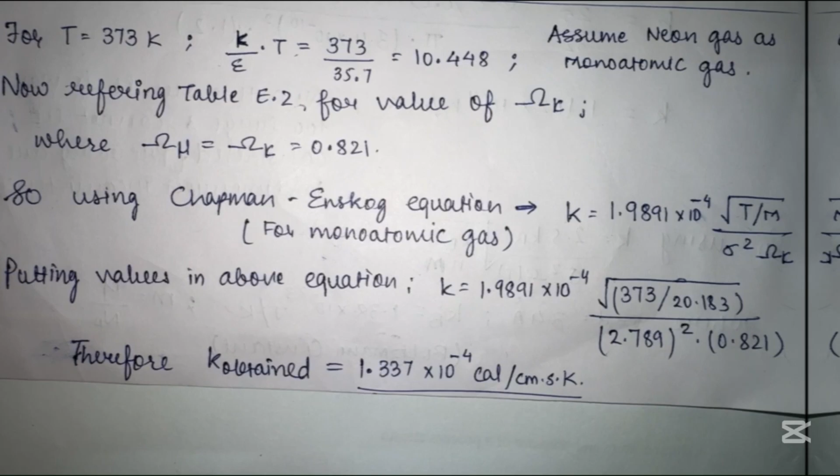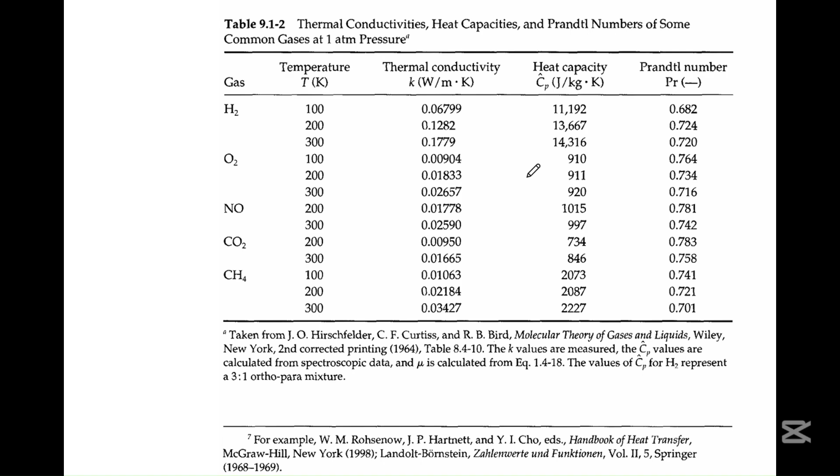Now for the following question we need to obtain the values for oxygen at 200 Kelvin temperature. So the experimental value obtained for the given pressure of thermal conductivity is 0.01833 watt per meter Kelvin. Then the respective heat capacity is 911 joules per kg Kelvin, and the respective Prandtl number is 0.734. We will use these values wherever required in the given question.

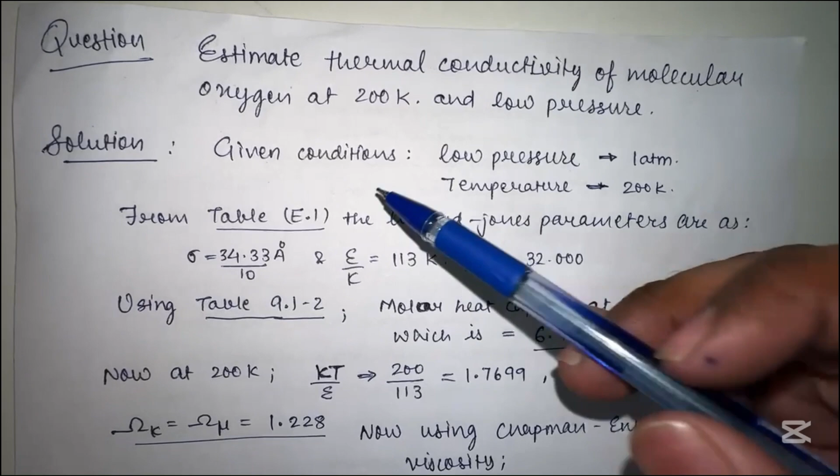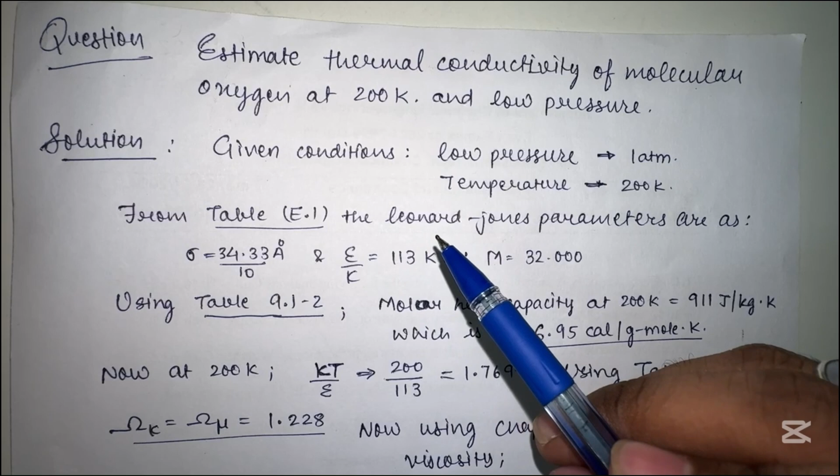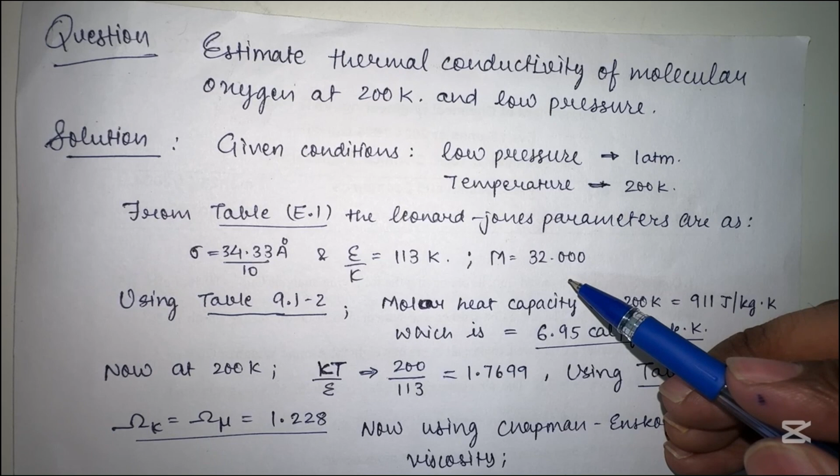Now we will discuss the solution for the given question. We will first analyze the given conditions, that is low pressure, consider it as 1 atmosphere, and temperature at 200 Kelvin. Now using table E.1 from the BSL book, we obtain the Lennard-Jones parameters, sigma is 3.433 angstrom and epsilon by kappa value is 113 Kelvin, and molecular weight of oxygen is 32 gram per mole.

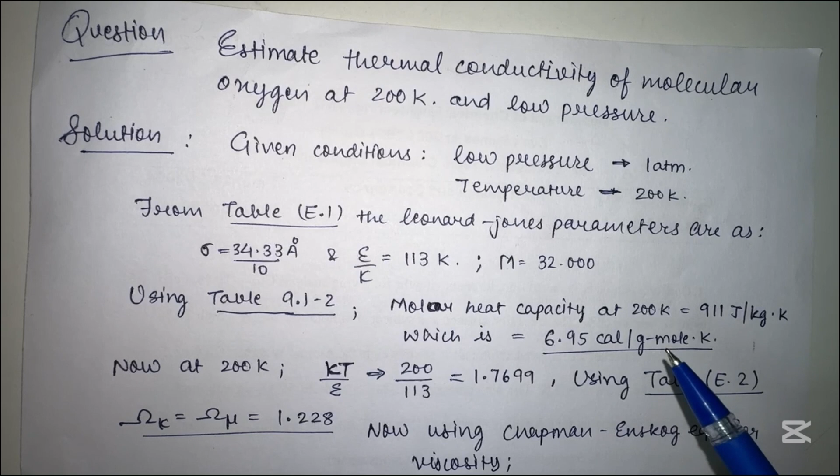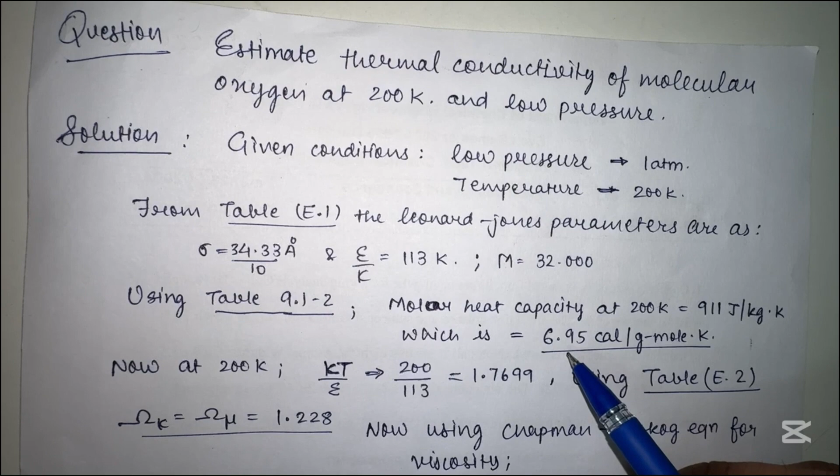Now again using table 9.1-2, we can obtain the molar heat capacity at 200 Kelvin for oxygen, that is 911 joule per kg Kelvin, which can be converted to CGS units as 6.95 calorie per gram mole.

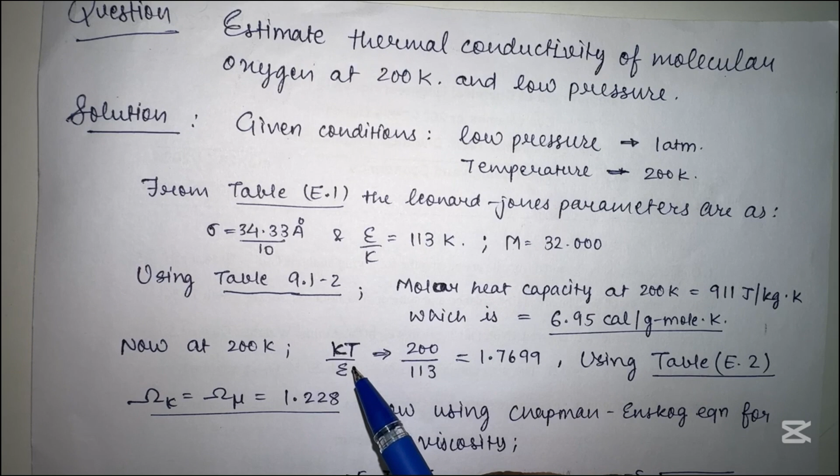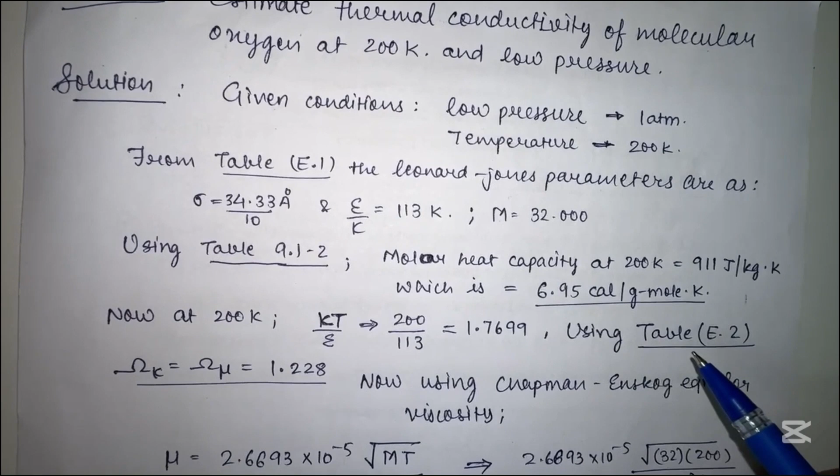Now at 200 Kelvin we can convert the Lennard-Jones parameters into kappa into temperature upon epsilon, which gives the value 1.7699. Now using table E.2 and the value of 1.7699, applying a bit of interpolation, we can get the value of collision integral omega.

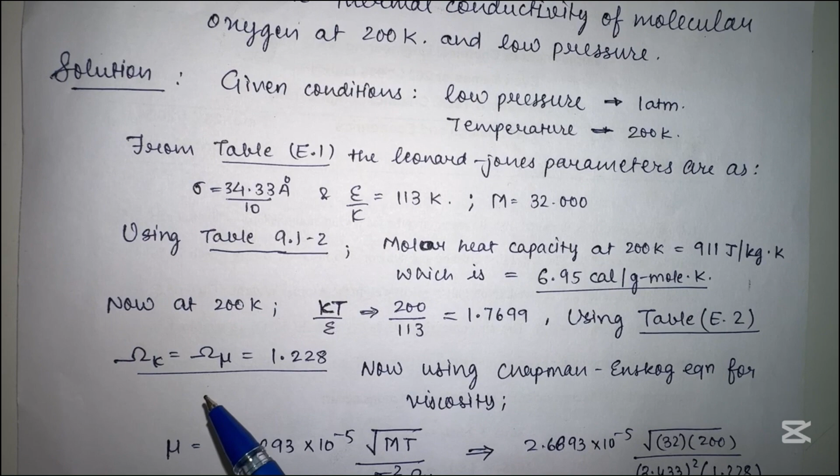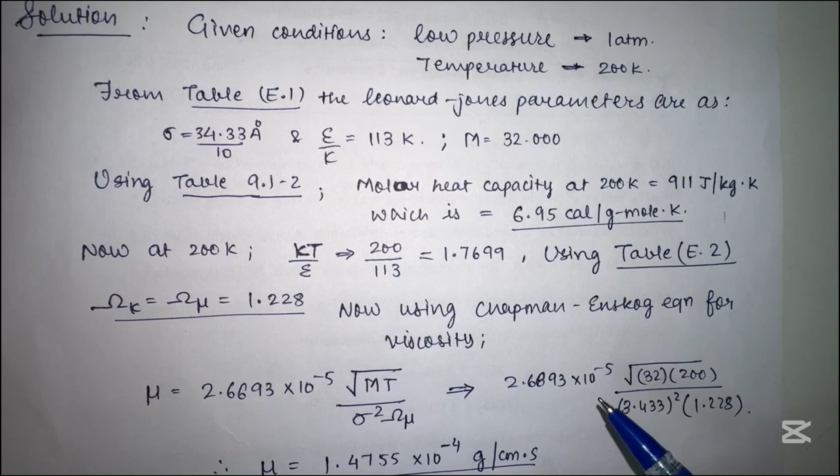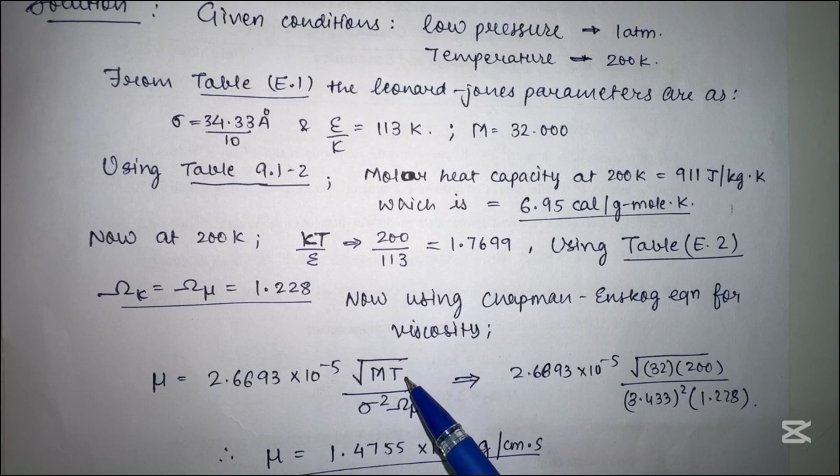That is 1.228. Now using these values into the Chapman-Enskog equation for viscosity, mu equals 2.6693 into 10 raised to power minus 5, into under root of molecular mass into temperature, divided by molecular diameter squared into collision integral. Putting in the given values, we obtain the viscosity for molecular oxygen at given conditions as 1.4755 into 10 raised to power minus 4 gram per centimeter second.

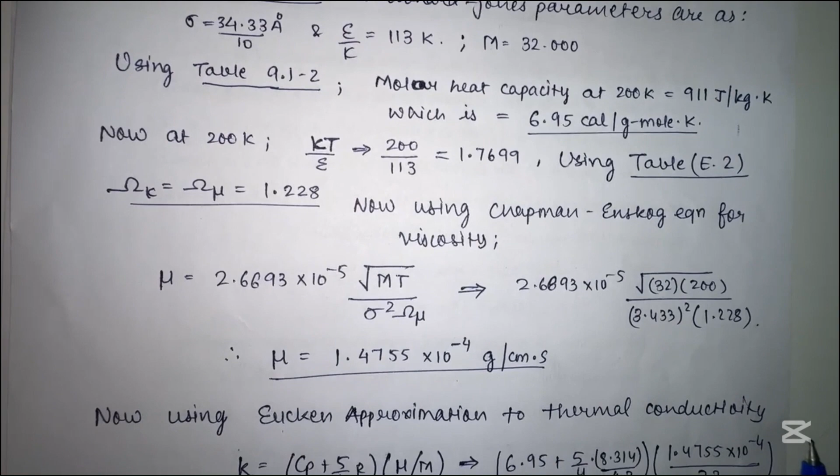Now to obtain the thermal conductivity from this obtained value of viscosity for molecular oxygen, we are going to use the Eucken approximation, given by the equation: K equals (Cp plus 5/4 times universal gas constant) into viscosity divided by molecular mass.

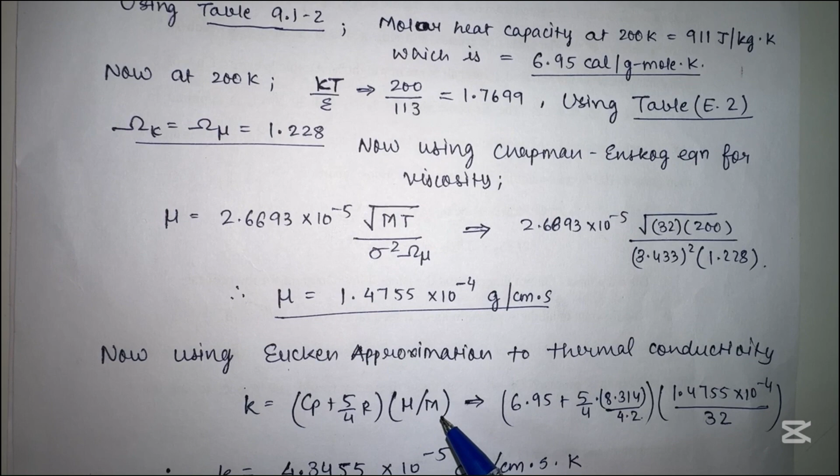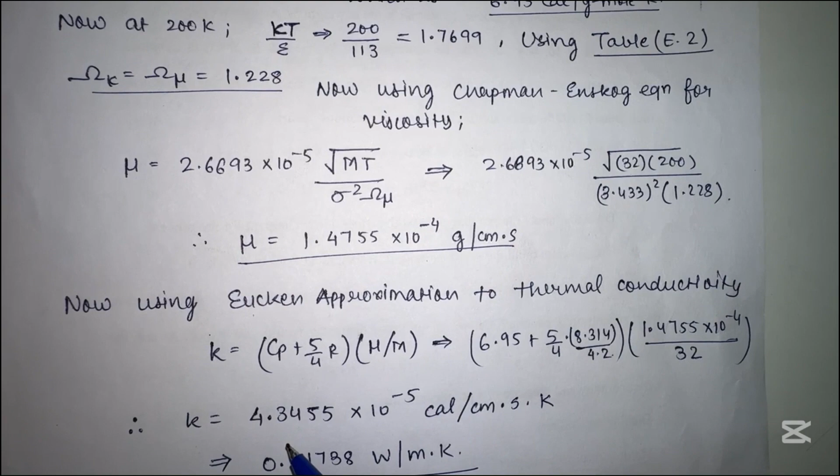Now putting the values into this equation, the Cp value indicates the molar heat capacity which we calculated above, that is 6.95 calorie per gram mole Kelvin. So putting these values into the equation, we get the value of K as 4.3455 into 10 raised to power minus 5 calorie per centimeter second Kelvin.

Now converting these dimensions into SI units, we get K equals 0.01788 watt per meter Kelvin.

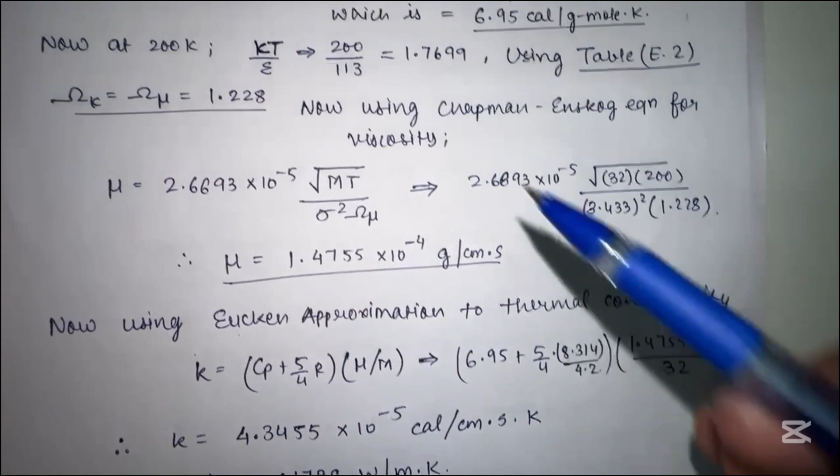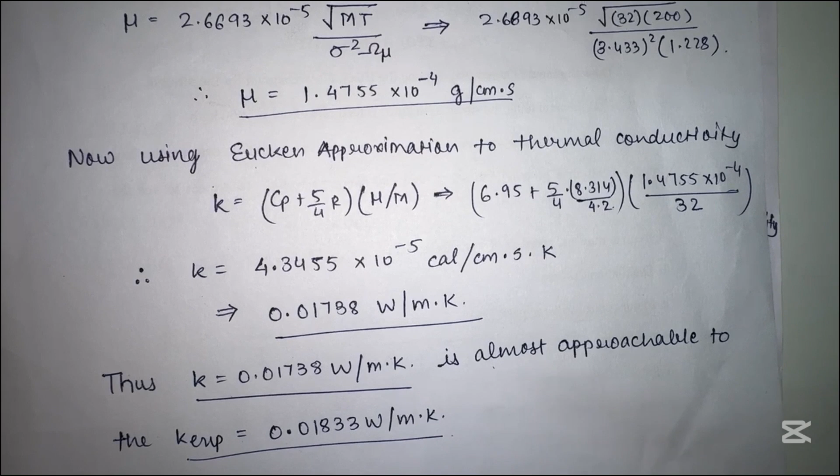Now again utilizing table 9.12, we can see that the experimental value given in the table is 0.01833 watt per meter Kelvin. So we can see that the calculated theoretical value for K, obtained from the Chapman-Enskog equation and using the Eucken approximation, is almost close to the experimental thermal conductivity value.

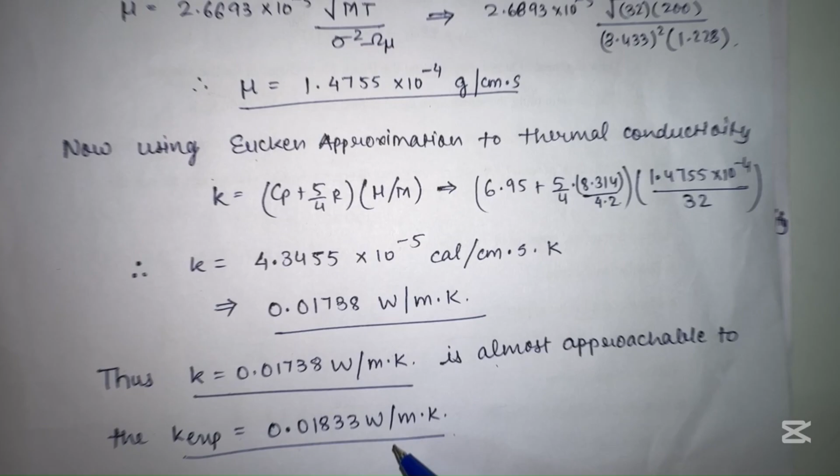Now we will discuss the following question. Predict the thermal conductivity of the given gaseous mixture at 1 atmosphere pressure and 293 Kelvin temperature from the given data on the pure components at the same pressure and temperature.

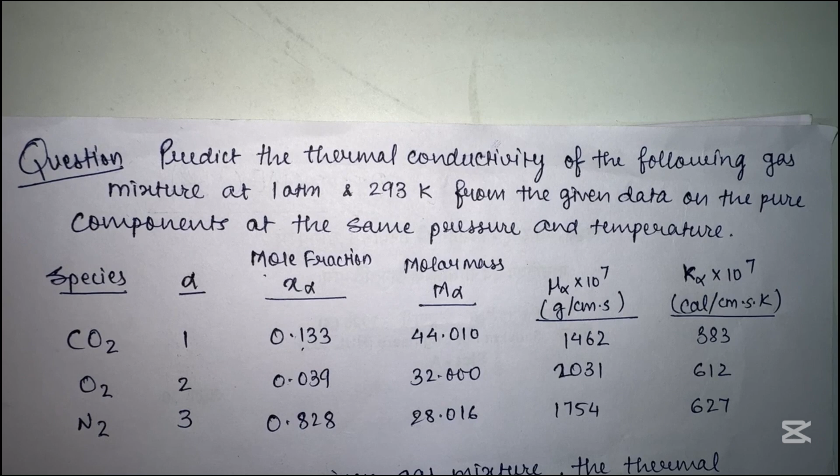The species or gaseous components included in the gaseous mixture are CO2 (carbon dioxide), O2 (oxygen), and N2 (nitrogen). The alpha value indicates the main component, with mole fraction given by X alpha, molar mass given as M alpha, the viscosity of the component at the given pressure and temperature as mu alpha (raised by 10 to power 7), and the thermal conductivity as K alpha (also raised as 10 to power 7).

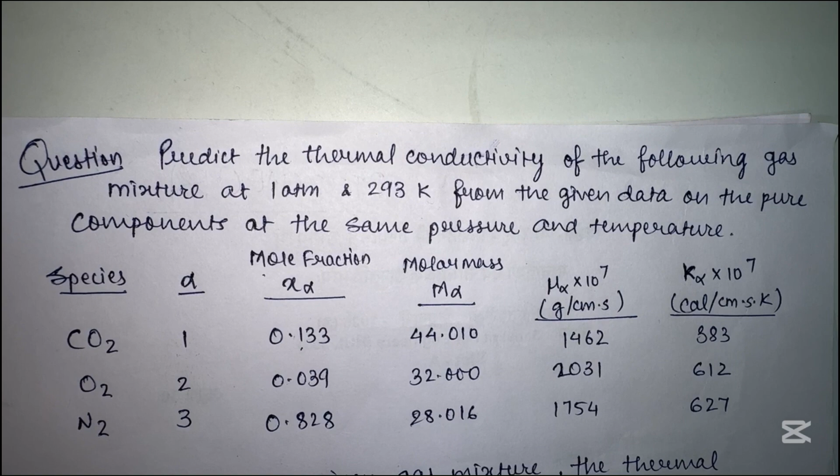Now we will look at the solution for the given question.

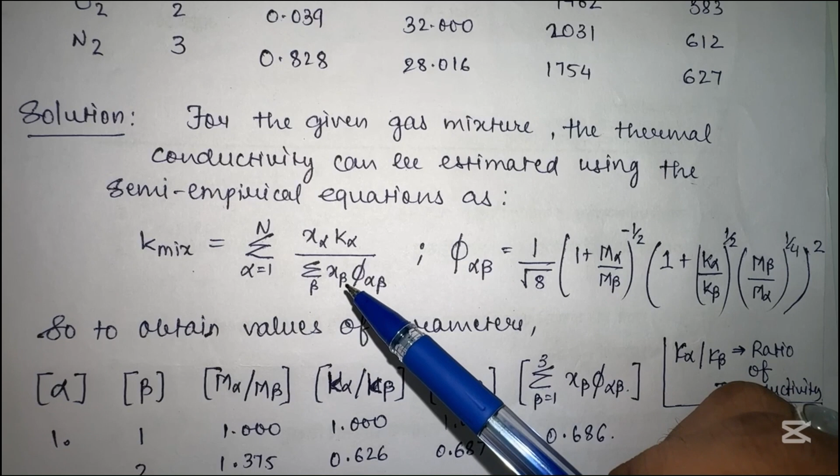For the following question, the given mixture's thermal conductivity can be estimated using the semi-empirical equation: K mixture is the summation of X alpha into K alpha, whole upon summation of X beta into phi alpha beta, where phi alpha beta is given by 1 upon root 8, multiplied by 1 plus m alpha by m beta whole power negative 0.5, into bracket of 1 plus k alpha by k beta whole power 0.5 into m beta by m alpha whole power 0.25, and the whole bracket raised to the power of 2.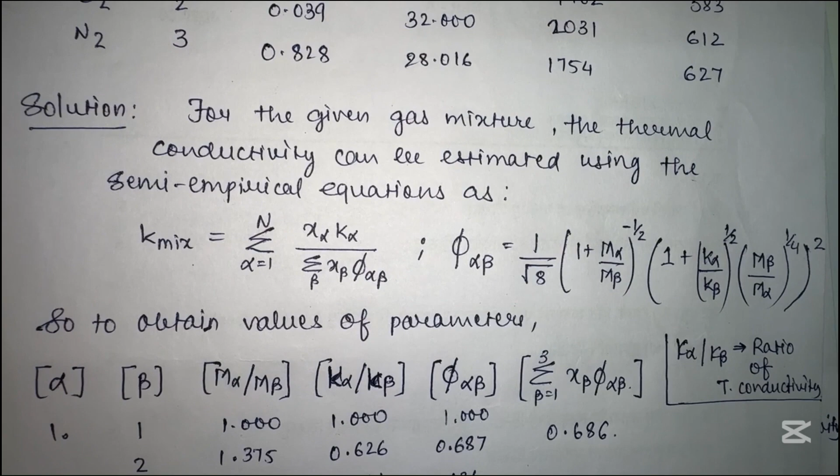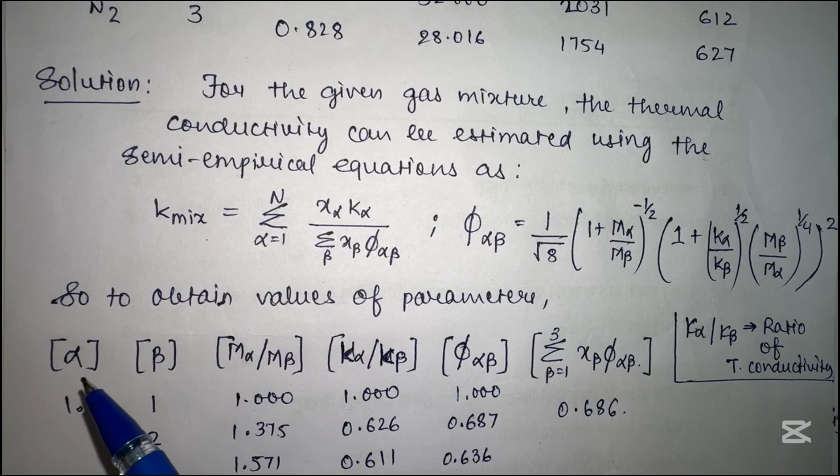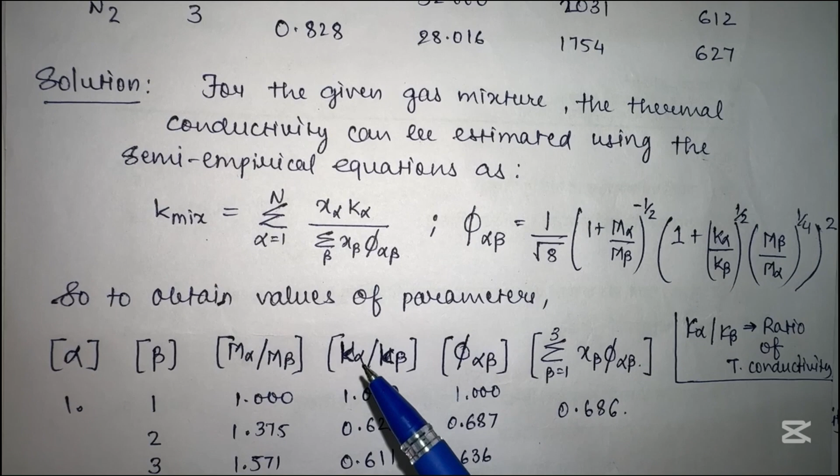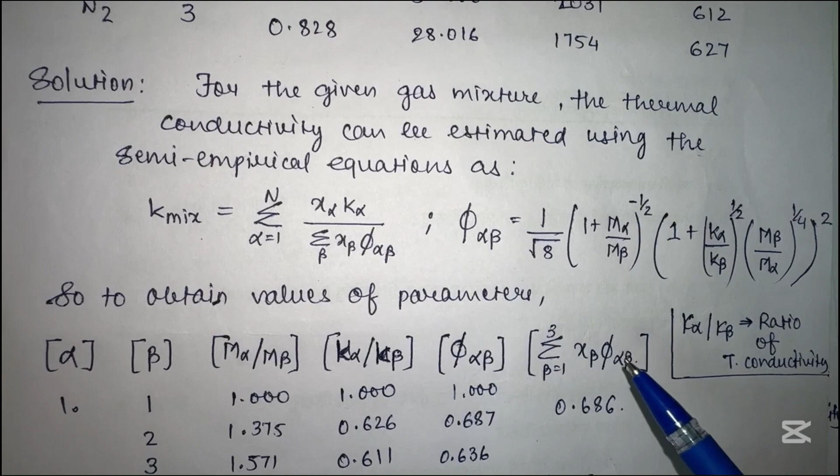Now, the value to be obtained for the given parameters will form a table with the following lists: where alpha value is mentioned, beta value is mentioned, the ratio of m alpha by m beta is mentioned, the ratio of k alpha by k beta is mentioned, the phi alpha beta value is calculated, and the summation of x beta into phi alpha beta is calculated. The following table can be computed using a calculator or by putting the values into an Excel file.

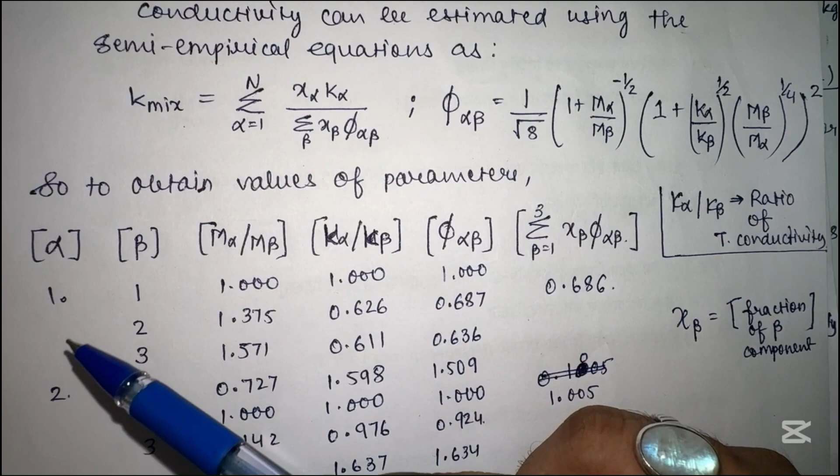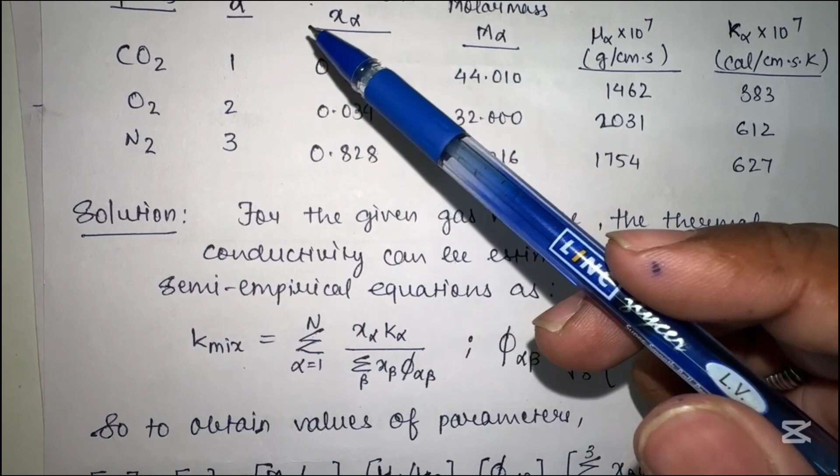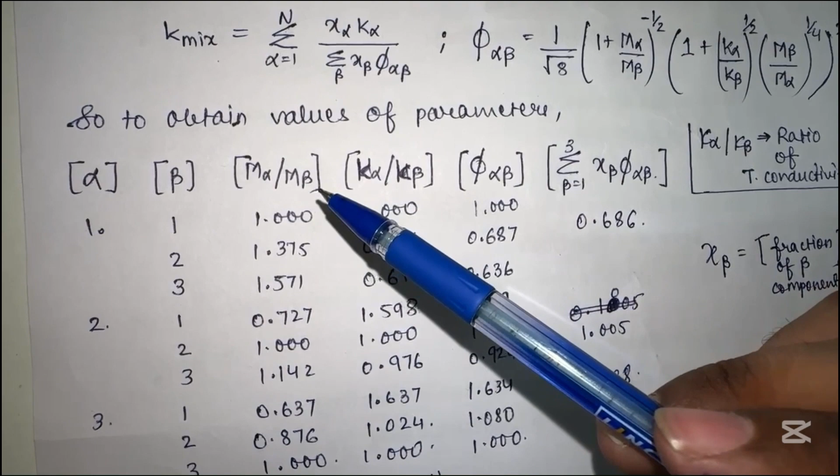Here the m alpha by m beta is the ratio of the molecular weight, where alpha equals 1 is carbon dioxide. So when alpha equals 1, consider carbon dioxide, and when beta equals 1, that also indicates carbon dioxide. So the given mixture is assumed to be carbon dioxide and carbon dioxide, so the m alpha by m beta ratio will be 1, as carbon dioxide mass upon carbon dioxide mass gives the value 1.

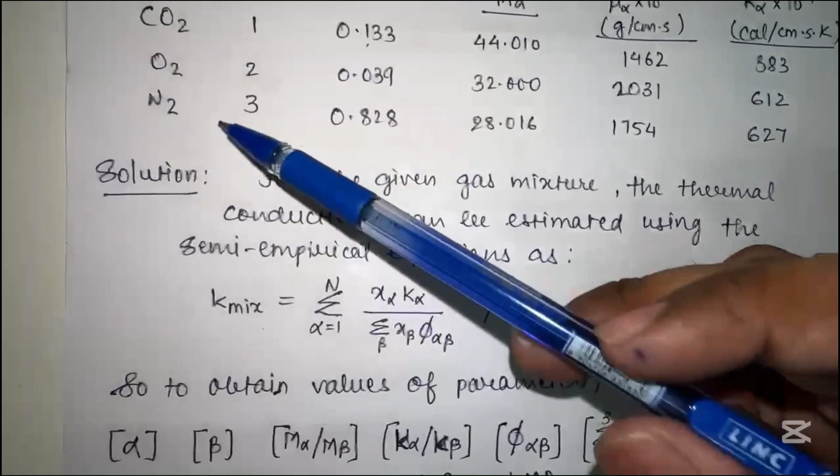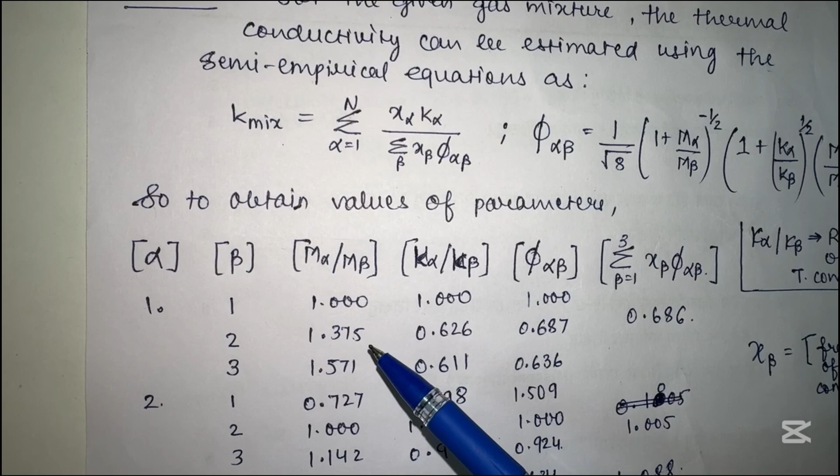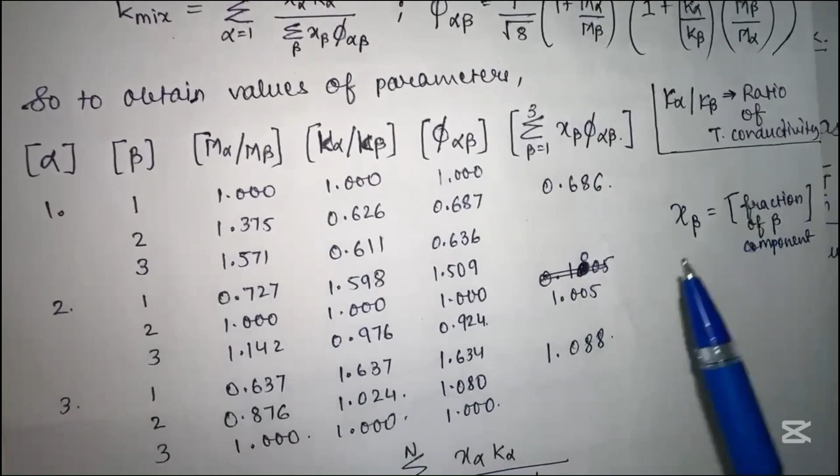Similar is the case for k alpha upon k beta value, and same goes for the phi alpha beta value. Now in case beta is 2, which represents oxygen, that is carbon dioxide and oxygen, then the m alpha by m beta value changes to 1.375. Also, the corresponding k alpha by k beta value changes to 0.626, and thus putting those values into the phi alpha beta equation, we get phi alpha beta as 0.687. Similarly, we can calculate this data for all of the conditions and all of the alpha and beta corresponding values.

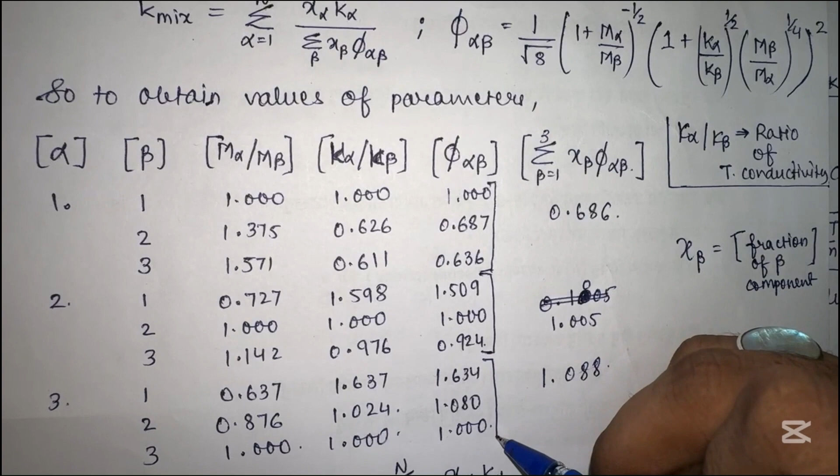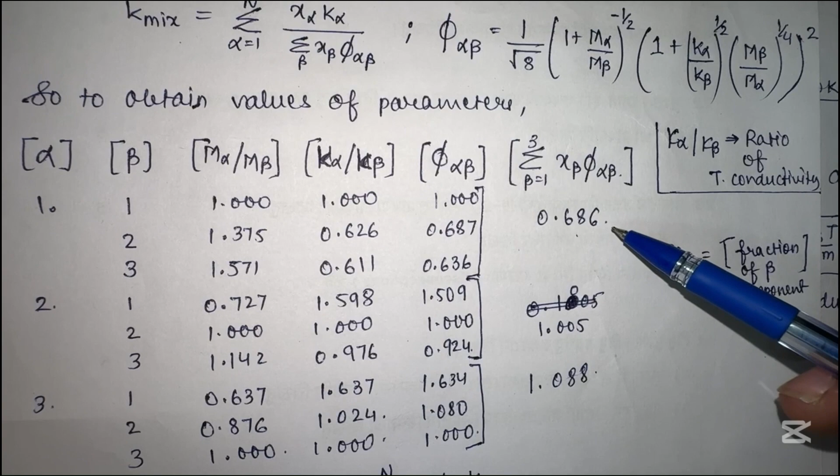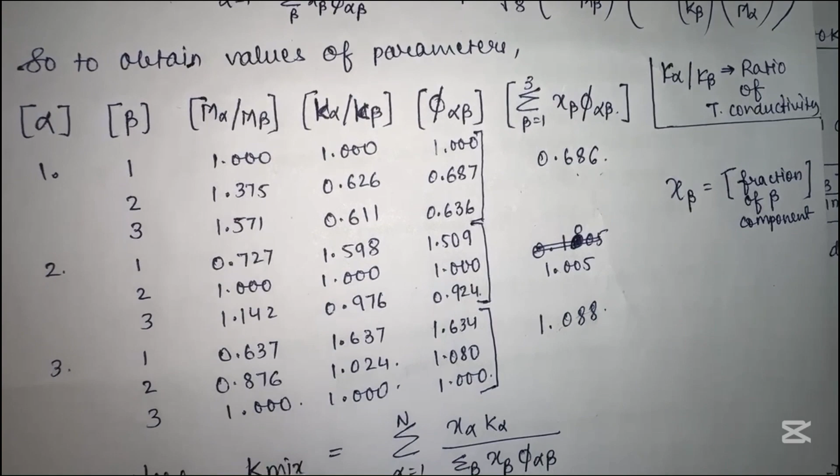Now, upon obtaining all the phi alpha beta values, we sum the following digits for alpha 1, alpha 2, and alpha 3. Upon summing the values, we get the summation of x beta into phi alpha beta as 0.686 for alpha 1, 1.005 for alpha 2, and 1.088 for alpha 3.

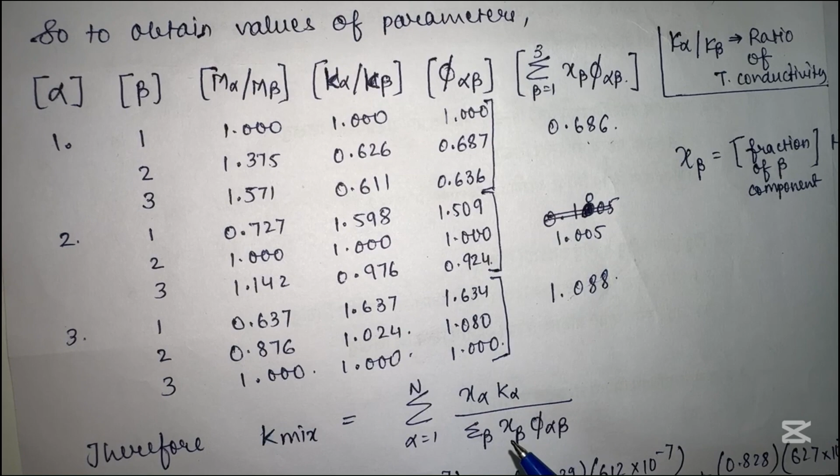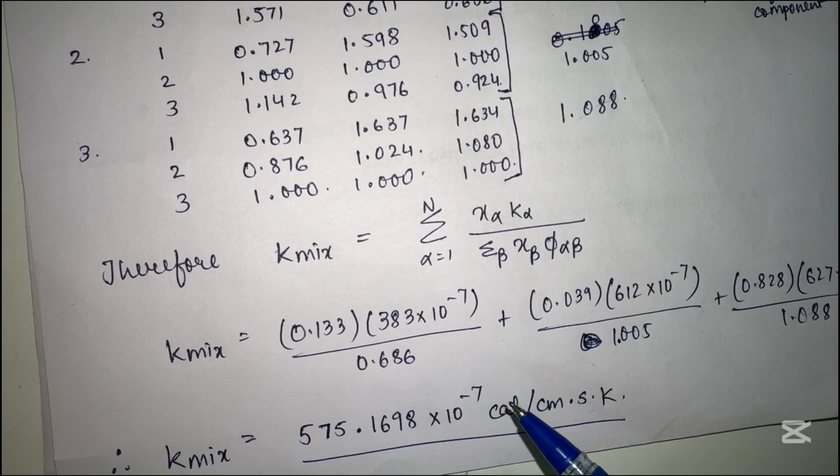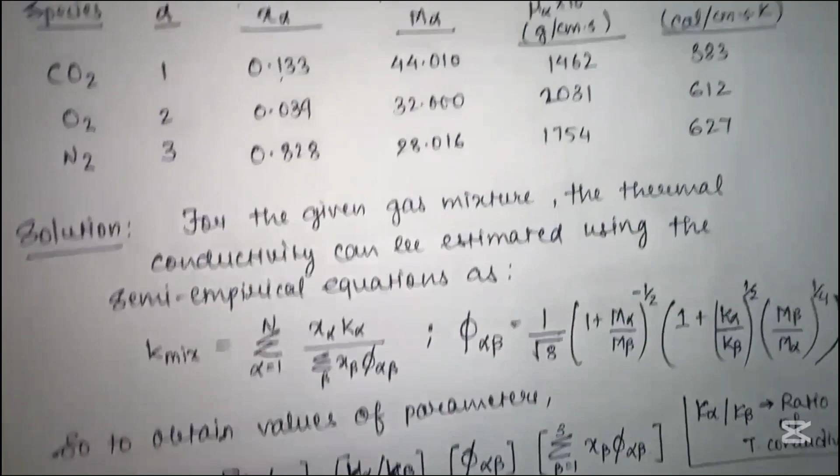Now, using the empirical formula shown before, we use x alpha into k alpha upon summation of beta of x beta into phi alpha beta. So the k mix can be calculated by inputting the values used above, and thus the k mixture value for the given gaseous mixture is obtained as k mixture equals 575.1698 into 10 raised to power minus 7 calories per centimeter second Kelvin. Thus, the thermal conductivity for the given gaseous mixture at 1 atmosphere and 293 Kelvin temperature is obtained from the given data set.

Now we will discuss this question: Estimate the thermal conductivity of ethane at 153 degrees Fahrenheit and 191.9 atmospheric pressure, from the experimental value of thermal conductivity K equals 0.0159 BTU per hour feet Fahrenheit at 1 atmosphere and 153 degrees Fahrenheit.

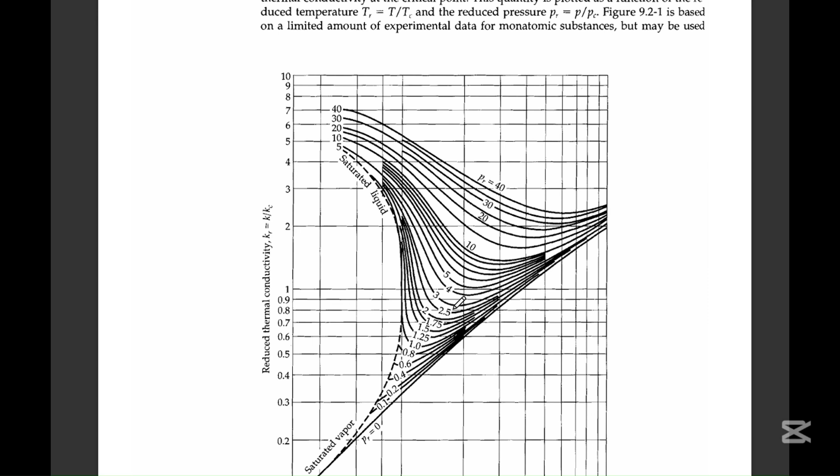We will refer to the plot of reduced temperature versus reduced thermal conductivity for solving questions requiring the values of reduced temperature and reduced pressure conditions. For example, in this question we have to obtain that TR is 1.115 and the respective PR is 0.021. Then the point lies somewhere between here.

Now in the same question we can also see that for TR is 1.17, the PR value is 4.16. We see this curved line for the PR, and respectively we calculate the KR point by plotting the points, that is PR is 4.16, so it will be somewhere here, and the respective value of TR will be this line like this. Then the KR value we are getting is somewhere here like this. So this is approximately 2.35 or 2.3, or we can even assume it as 2.4 due to considering some of the errors that may be there.

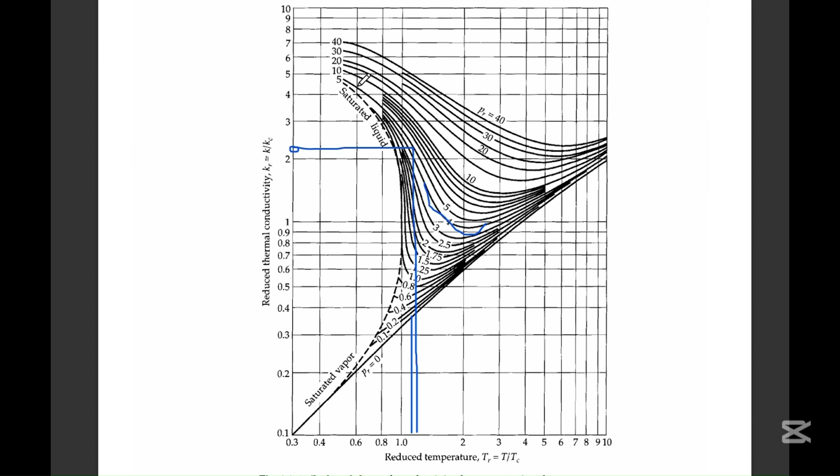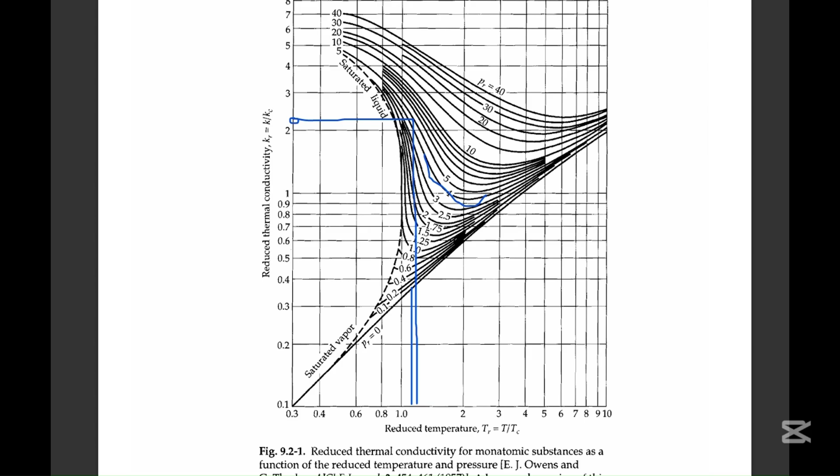Thus we are using the plot that is given in the BSL book to calculate the critical points or the reduced values for the given conditions. Now we will discuss the solution for the given question.

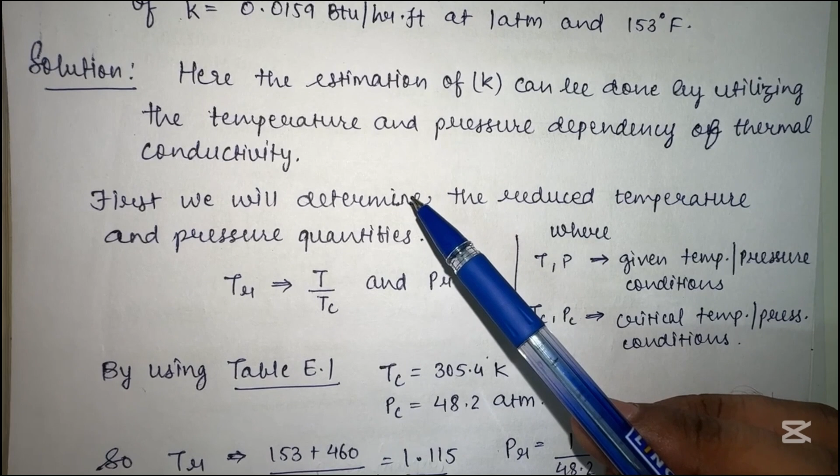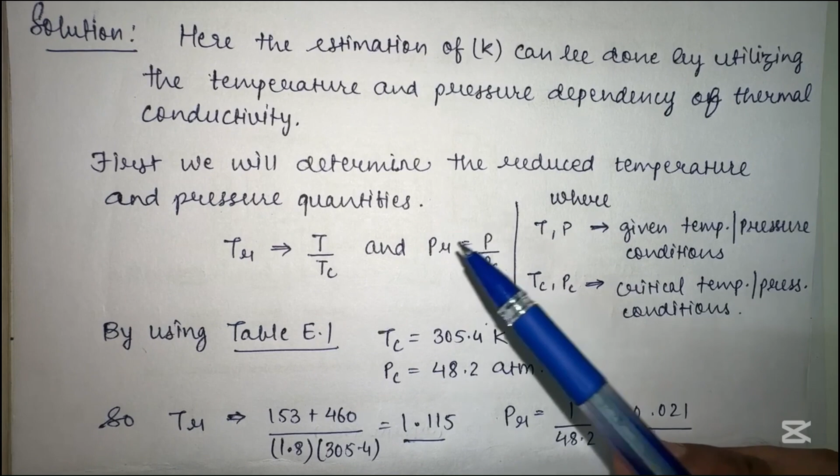Here the estimation of thermal conductivity can be done by utilizing the temperature and pressure dependency of thermal conductivity, that is the plot given between the reduced temperature and reduced pressure, that is figure 9.2-1 of the BSL book. First, we will determine the reduced temperature and pressure quantities for the given condition.

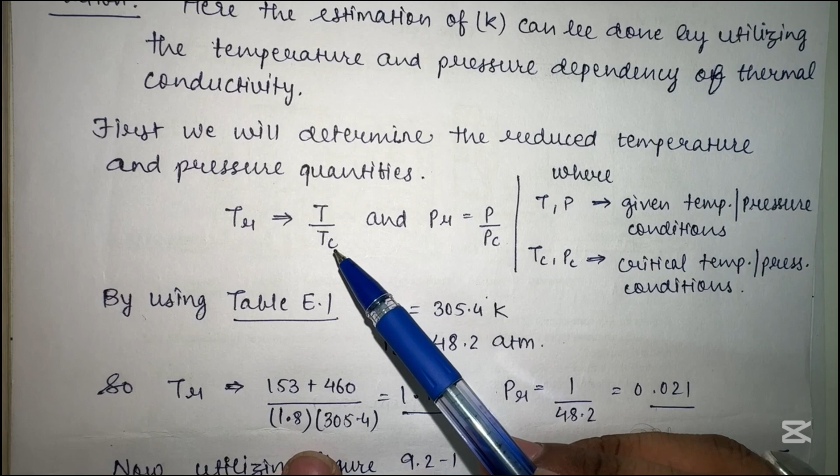The reduced temperature can be given as T, that is the given temperature condition, upon Tc, that is the critical temperature condition, and the reduced pressure can be given as P, which is the given pressure condition, upon P critical, which is the critical pressure condition.

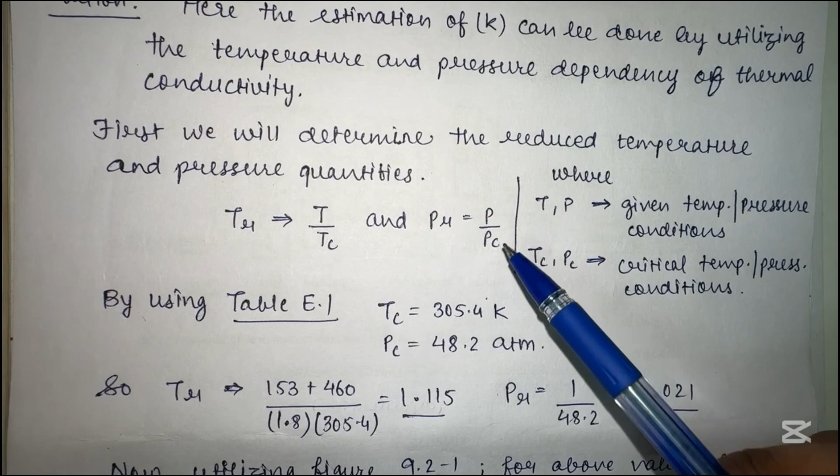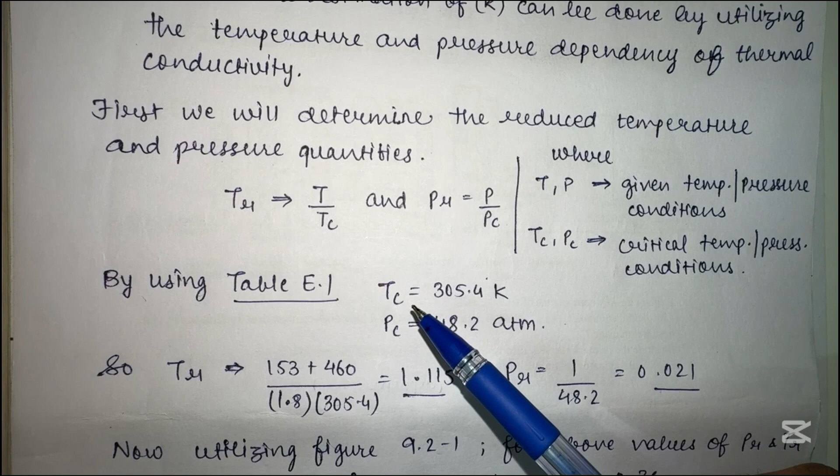Now, by using table E1, we can obtain the Tc, that is critical temperature condition, and Pc, that is critical pressure condition for ethane gas.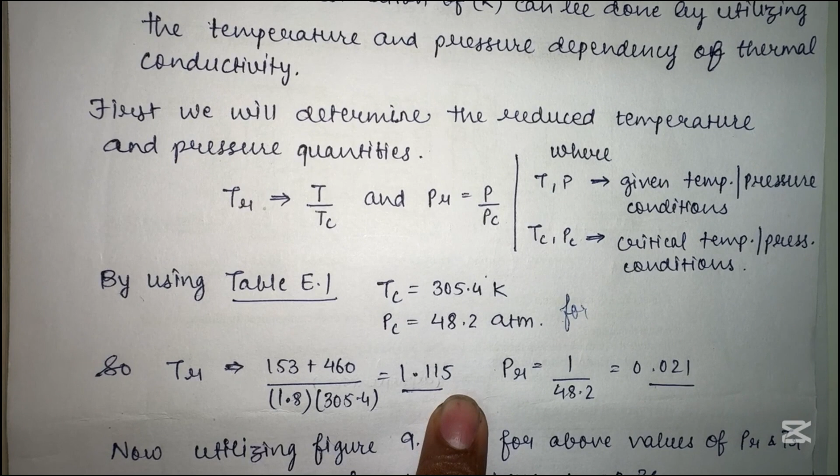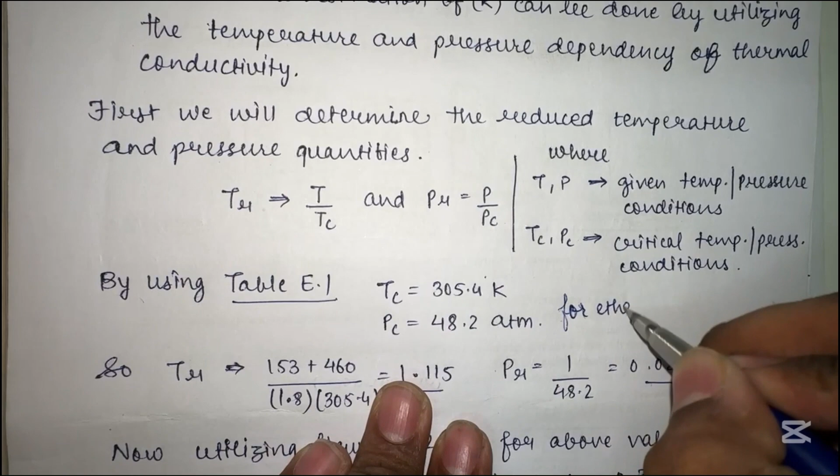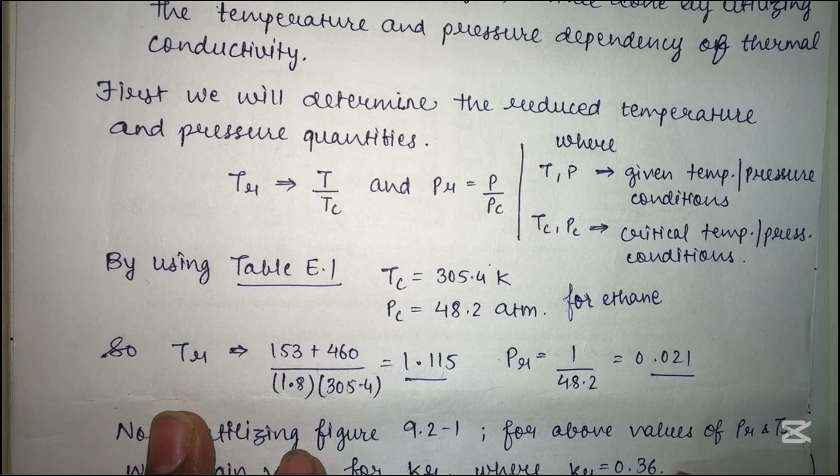So the Tr can be calculated as the equation, and PR can be calculated using the given relation. Now we have to keep in mind that the temperature given in the question is in Fahrenheit, so we will have to convert it into Kelvin for

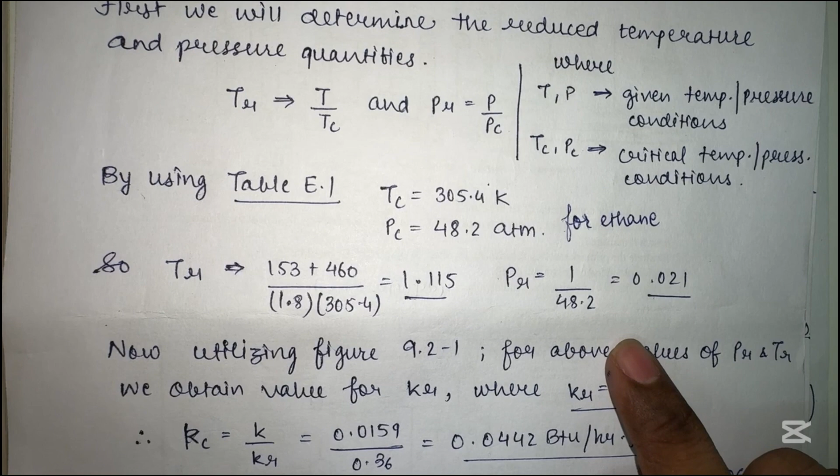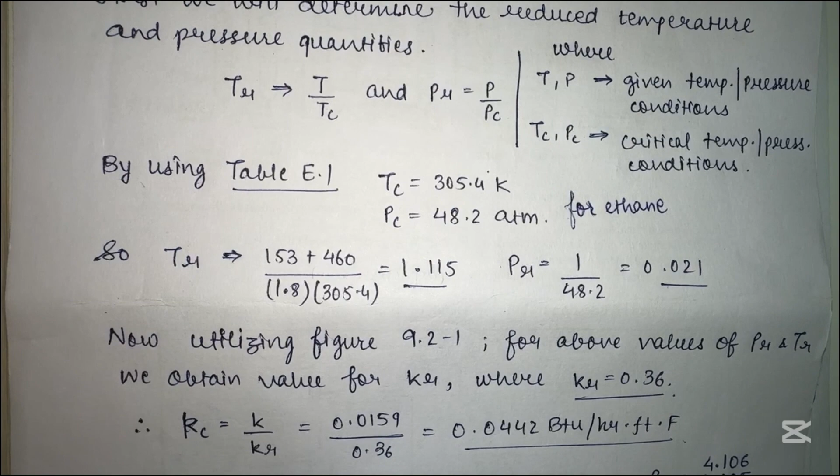abiding by the relation that is given in the reduced temperature and reduced thermal conductivity relation, that is in the plot. So upon calculating the TR and PR values, we will now utilize figure 9.2-1 and obtain the values of PR and TR, that is the reduced pressure and reduced temperature conditions. Now, as we look into the plot for the value of reduced thermal conductivity, we obtain the value of Kr,

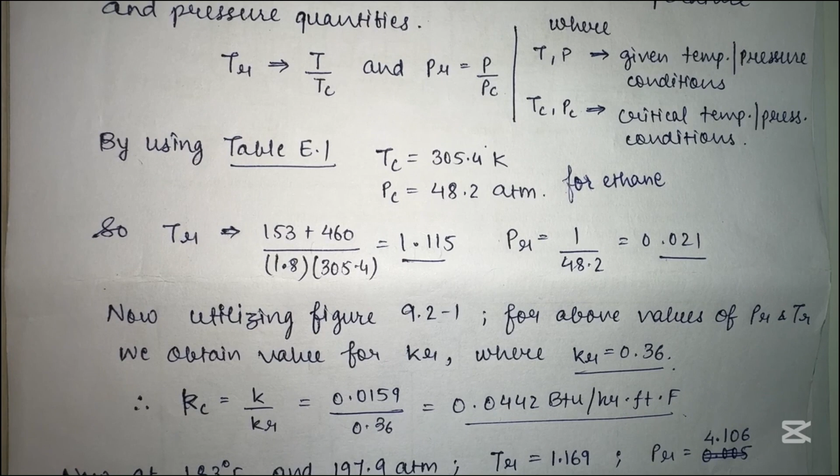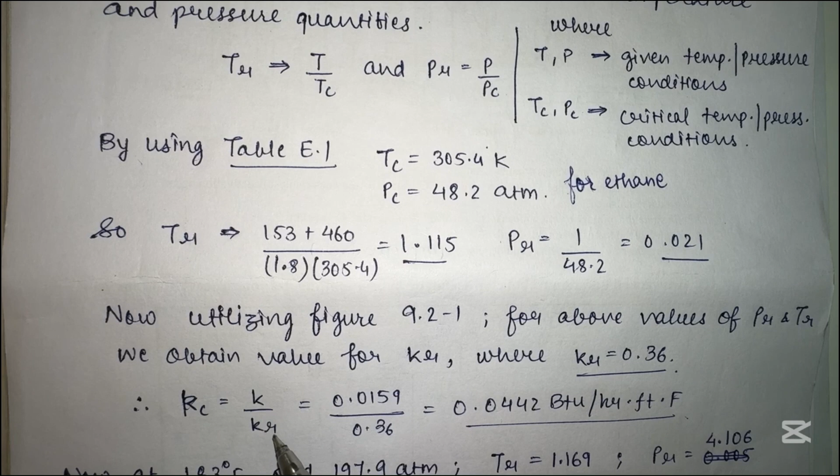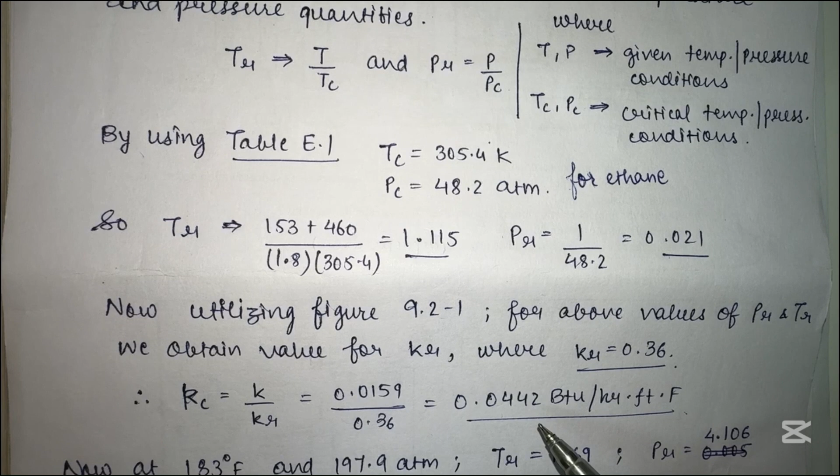that is the reduced thermal conductivity, as 0.36. Now, Kc, that is the critical value of thermal conductivity, is given as K, thermal conductivity, calculated upon reduced thermal conductivity. So we obtain the value of critical thermal conductivity as 0.0442 British thermal units per hour feet Fahrenheit.

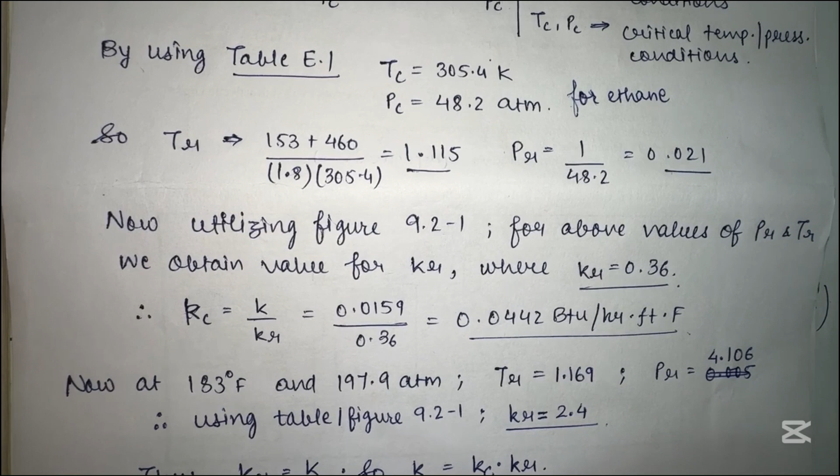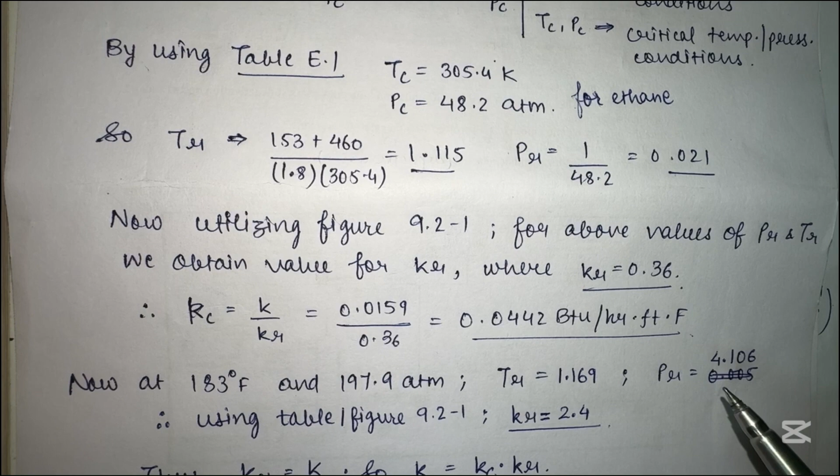Now, at the given conditions, that is 183 degree Fahrenheit and 197.9 atmospheric pressure, we need to calculate the reduced temperature and pressure, which can be found or calculated using the above relation: T by Tc, and Pr is equals to P by Pc.

So as we have calculated the temperature and pressure reduced conditions, again we will use the table or figure 9.2-1 and obtain the value of reduced thermal conductivity.

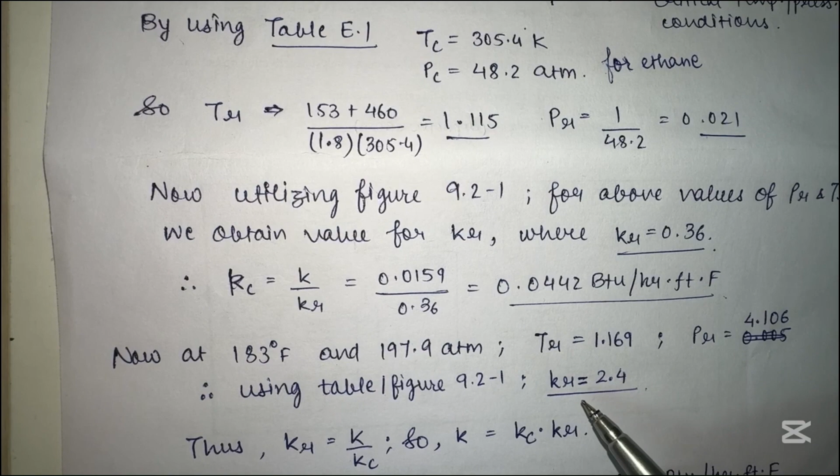Now once we have obtained the reduced thermal conductivity, that is Kr, 2.4, then we can apply the relation Kr is equals to K by Kc. So K is equals to Kc into Kr.

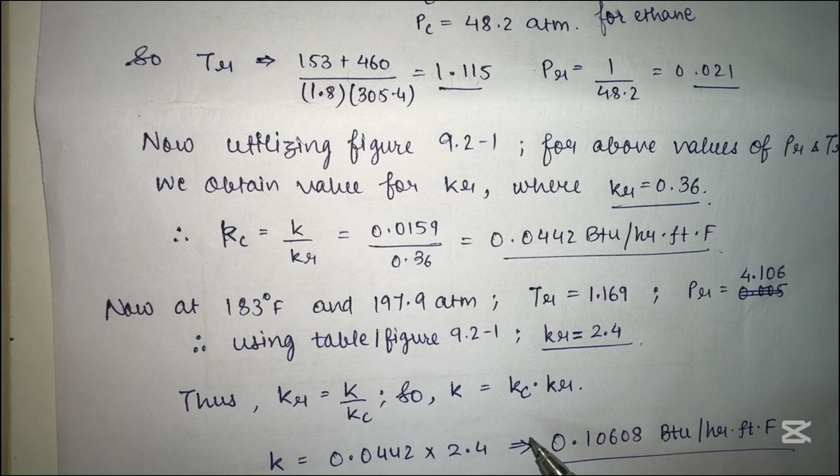Here K, or thermal conductivity that needs to be found at the given condition, is given as 0.0442 into 2.4, which results in 0.10608 British thermal units per hour feet Fahrenheit.

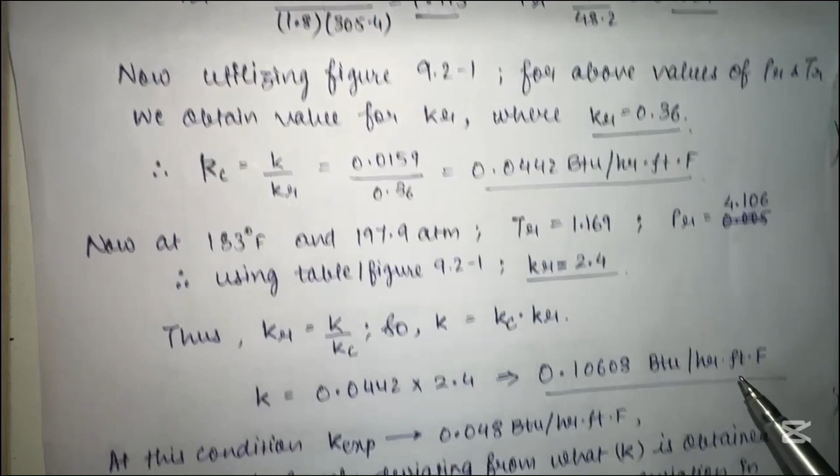Now, at this condition, the experimental value of thermal conductivity found is 0.048 British thermal units per hour feet Fahrenheit, which is largely deviating from the K value we have obtained above theoretically.

Now, this indicates the deviation in the properties for polyatomic molecules, as the relation we are assuming above is considered for the monoatomic molecule. Now, ethane, that is C2H6, is not a monoatomic molecule in reality.

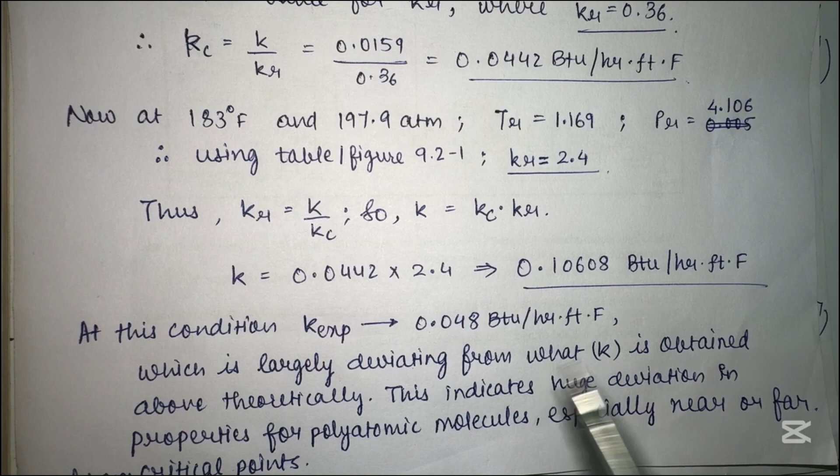So, this deviation occurs especially in cases even if it's considered near the critical point of the molecule, or the condition is far from the critical point of the molecule. Thus, this is the deviation we can see, and hence this correlation cannot be relied on for solving the temperature or pressure conditions and obtaining the thermal conductivity of the molecule.